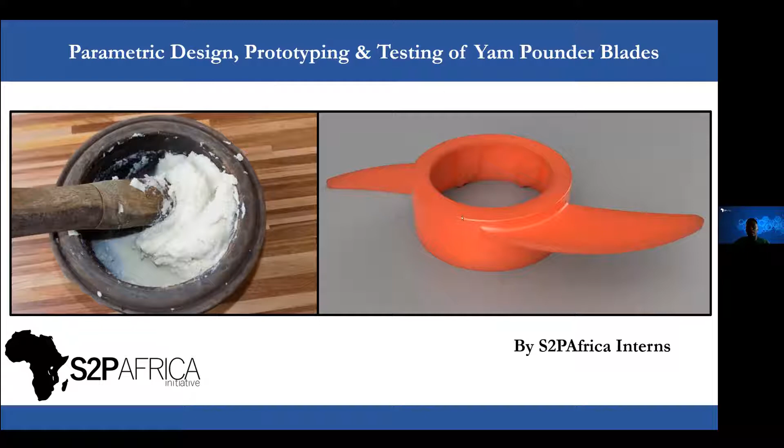So, Pounded Yam is a popular West African staple, normally eaten or complemented with soups, and is a very delicious meal by my heart. And traditionally, it is made by pounding yam into a thick, consistent paste. We use the mortar and pestle to do that. But now there are modern machines that actually do the work. So we have pounded yam machines that pound yam very well. But these only pound yam.

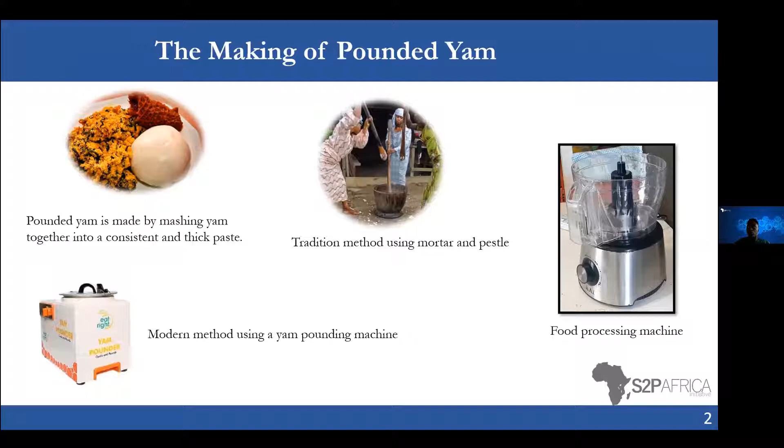People over time have realized that you could use food processors to pound yam, but therein lies the problem. The blades for food processors are generally designed to slice and dice yam. They don't really pound the yam properly. So what you end up having is a lumpy mash of food. And locally made machines actually do pound the yam very well, but they're usually expensive and they're usually over-designed. So we wanted to exploit this.

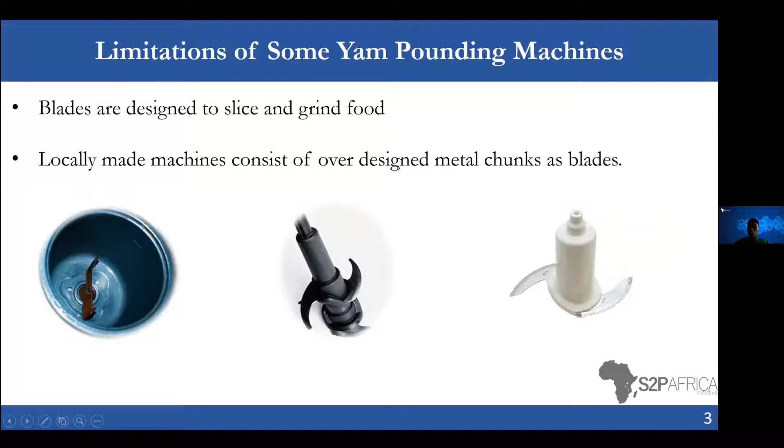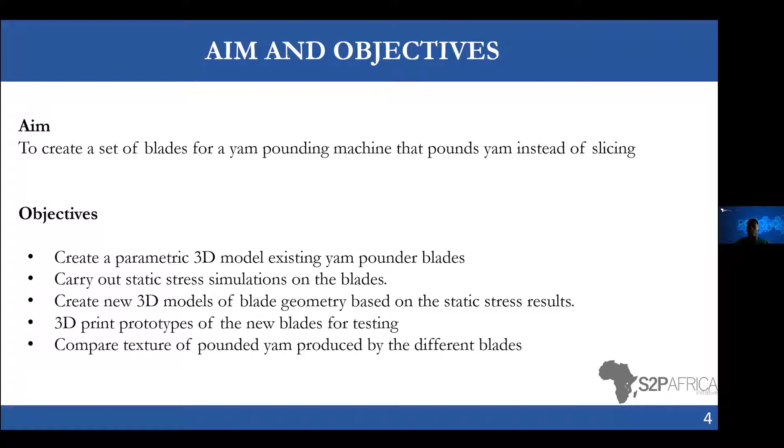What do we want to do? We want to design a set of blades that will properly pound the yam. How do we hope to achieve this? We'll be creating a 3D model of existing blades. We're going to carry out static stress simulations to see which parts of these blades are most likely to fail. We'll create new models based on that result. We're going to print these blades and we're going to test them. So we're going to be comparing the texture and how well they pound.

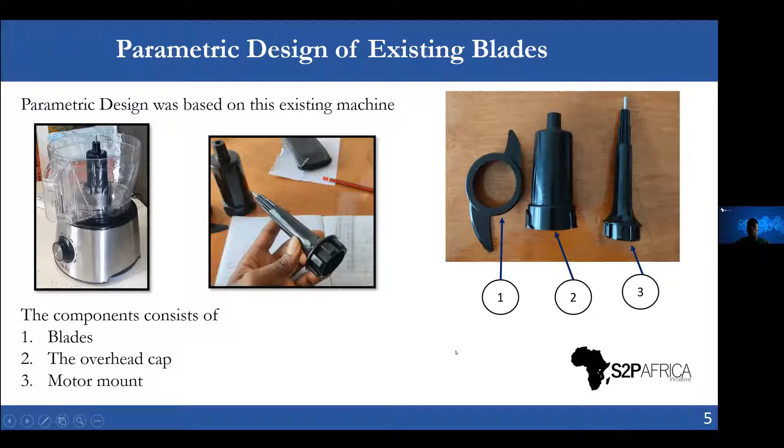The pounded yam assembly consists of 3 parts: the blades, as you can see here, number 1, the overhead cap, and the motor mount. So these 3 components are joined together and they are put into the food processor on the left. So what we want to do is reverse engineer all of these components so that we can 3D print them and make tweaks to the design. So here we have the model, that is the motor mount and the overhead cap. These were designed using Fusion 360, and you can see a section through the model.

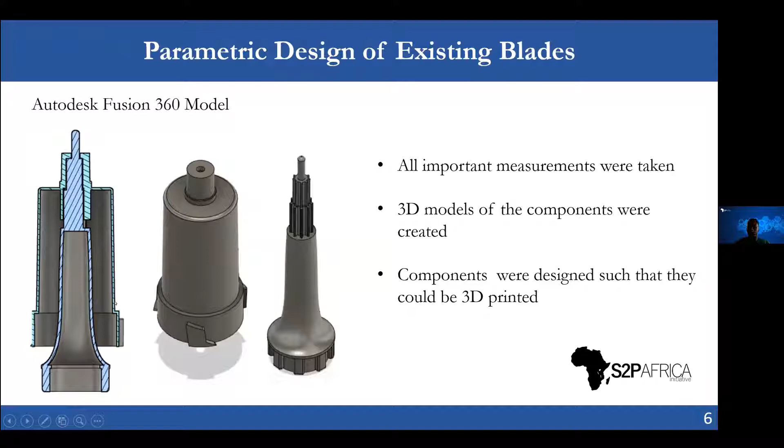Now, the important aspect of this, which is the blades. What influenced our design decisions were basically the pounded yam blades for the machines and the food processor blades. The food processor blades didn't pound properly, but the pounded yam blades pounded properly, but they were just over-designed and heavy. So basically, we brought the best of 2 worlds together. We moved from a slimmer profile to a much chunkier, thicker profile that does the work of pounding better. So this is how we progressed throughout the design phase.

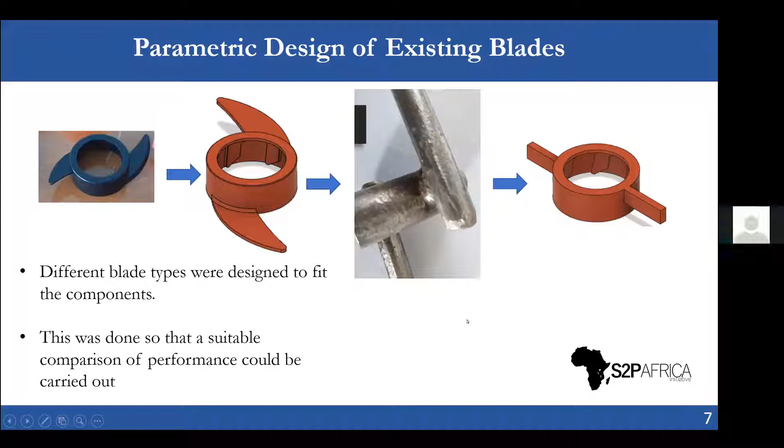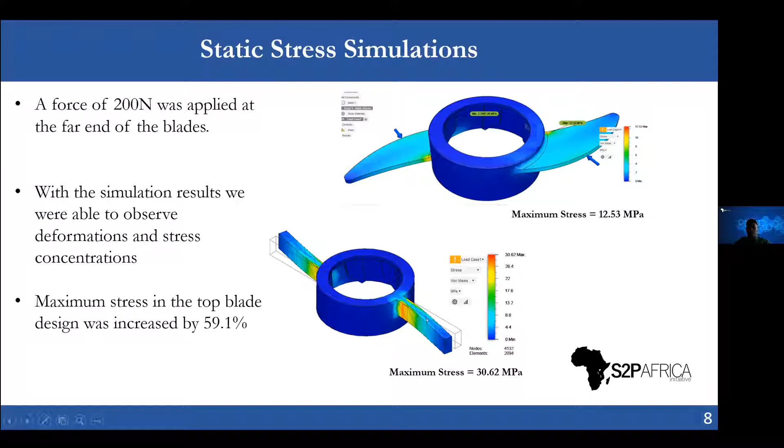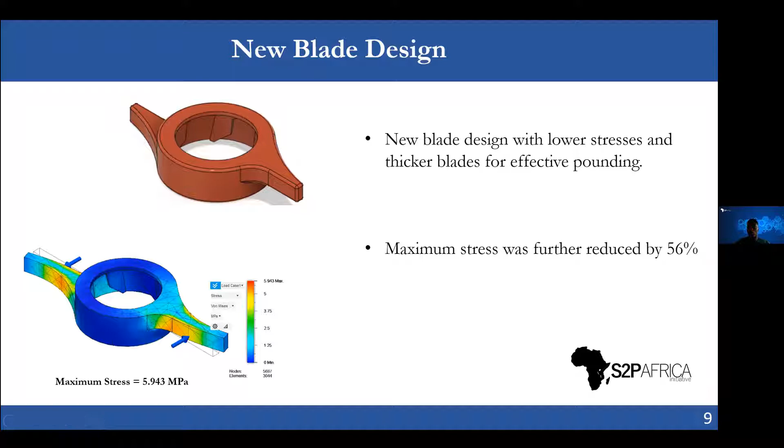And when we refined our geometry and added fillets, we were able to reduce the stress from the original by about 56%. So these new blades are actually stronger than the original, while still giving us the ability to pound yam better because of their beefier features.

Now, permit me to go into a little bit of continuum mechanics here. The reason why we're explaining this is so that we can understand why the von Mises stress is important for us in our simulation. In most simulation software, specifically Autodesk, they use the von Mises stress, and this is because in order to define stress, you actually need 9 components, and all of these components form a tensor. So you need to be able to do an apples-to-apples comparison. We can't necessarily compare a tensor with a scalar, and in this case, our scalar is the yield strength.

So what the von Mises stress allows us to do is find an equivalent magnitude, basically a representation of all of these tensor components as a scalar value, that is, an invariant of the stress tensor, that we can use to do an apples-to-apples comparison. So that's why the von Mises stress is very important.

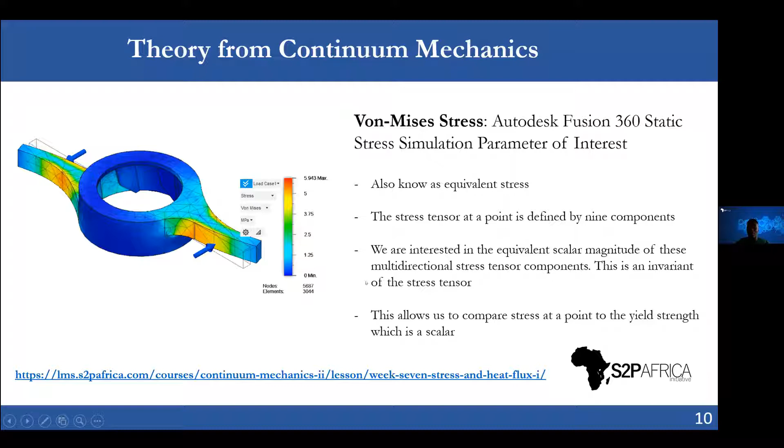For the prototyping, after we had defined our design, we imported them into the slicer software. And here in the slicer software, we can tweak various parameters of our model.

We can increase the number of layers, we can increase the infill, and all those kind of things. And what it does is the slicer converts the 3D CAD file into G code. G code is a set of instructions that the 3D printer can carry out.

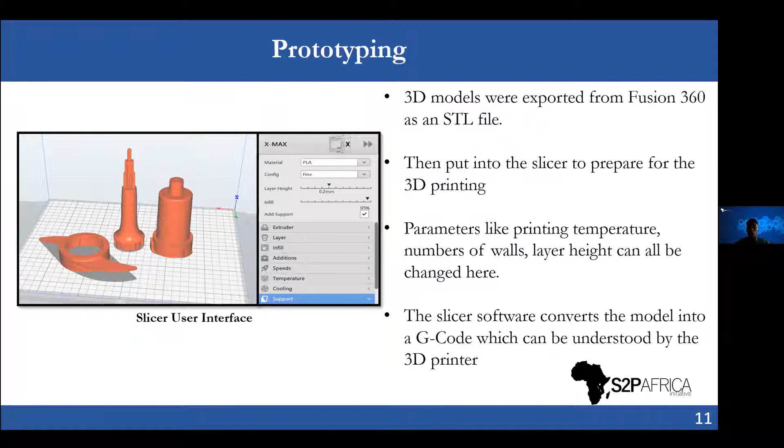Now, at this point, it is important to note that 3D printed parts are generally weak along the z-axis. We did not anticipate this at first because in our simulation, we couldn't see it. Our simulations are carried out as if the whole model is solid. But when we design them, they're going to be in layers.

So there's a chance for us to have a torque failure because these parts are going to be rotating. So when we saw this, we added more walls and more shells in the design so that we can compensate for this failure.

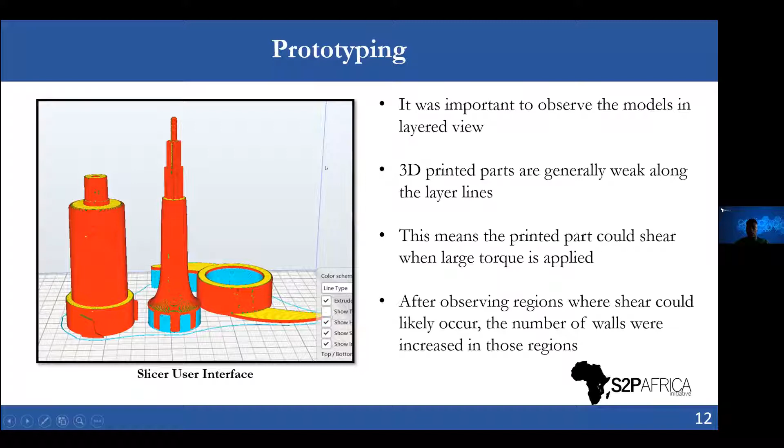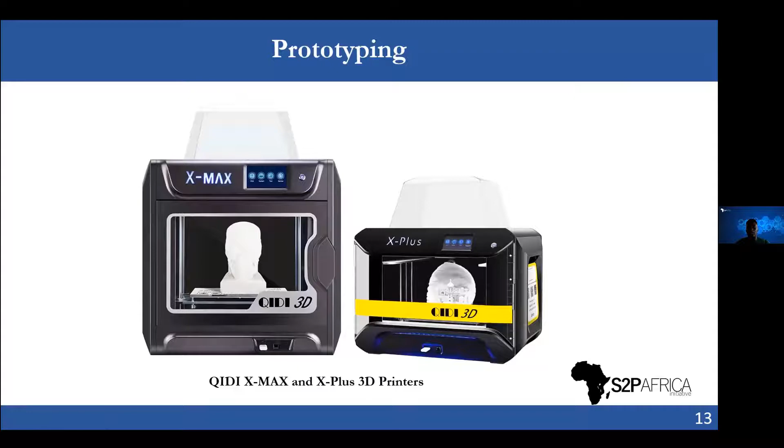Now, I love talking about hardware, so I have to put this here. For those that are curious about the hardware we use to prototype, we use the QIDI X-MAX and the X Plus printers for 3D printing. These are both direct drive printers that we have over at the lab.

So here we have some of the printed components. It turns out that 2.5 mm in your design isn't entirely 2.5 mm when you print it out. There's always that slight tolerance that you have to deal with. So at first, when we printed the blades out, they didn't really fit properly. Some parts were too big, some parts were too small.

I guess that's something you have to go through when you're prototyping. So we made several tests until we got the blades that actually fitted well together. These are just samples of what we designed.

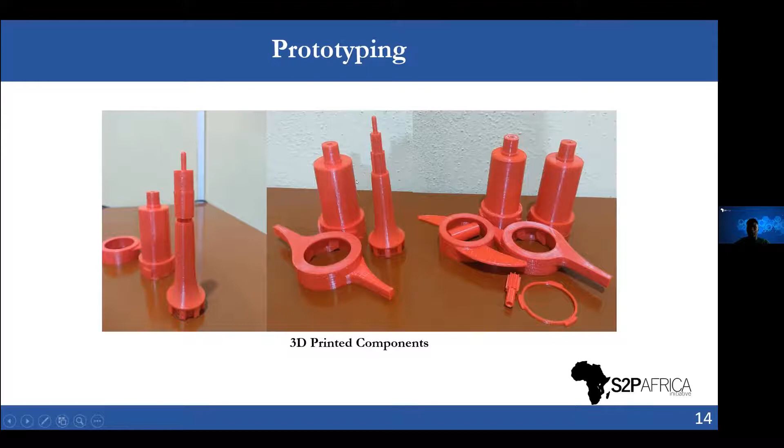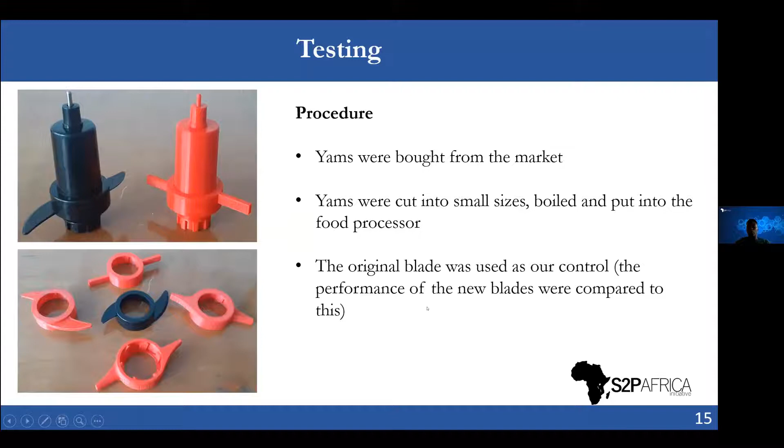So I'm going to play a video now, so you guys can see the results we got from our testing. Okay, so these are yam. This is our setup. This is the yam after cooking it. This is the yam in the food processor, and this is after we've pounded it.

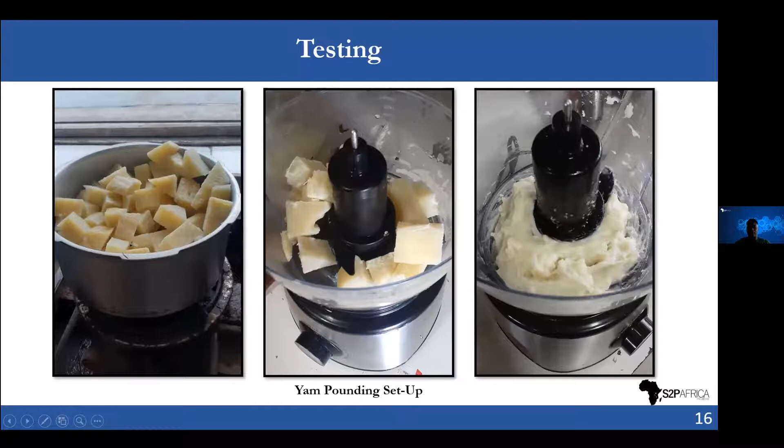Okay. Good day. This is our first test. We're testing our yam pounder blades. For the first test, we have the original blades that came with the yam pounding machine. Notice that these blades are black, and this will be our control test, our control experiment.

Okay, so we're about to start the second test. These blades were designed to fail, at least according to the static stress simulation, under a force of 200 newtons. So we want to see if the yam that we've boiled can actually exert that much force on these blades.

These are the results of our second test. We can see the performance of these blades, not as neat as the first test. We'll move over to testing the third blade. For test 3, we're going to be looking at this set of blades. They have thin blades compared to the blades used for the second test. I want to see how well they can pound the yam using the blender.

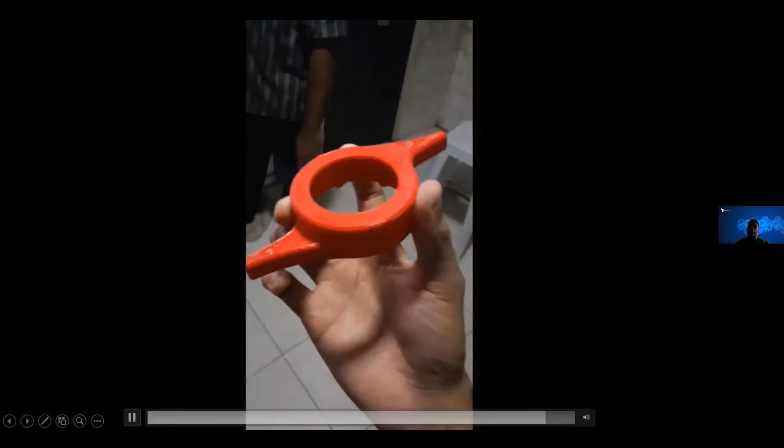On our fourth test, we can see this very excellent result. We can see that the yam is uniform in texture on all sides. It's a very good blend, ready to eat. Experiments done, we can see that the blades from our fourth test performed the best and gave the smoothest texture of pounded yam. These blades take the day.

So these are our optimal blades. These were our best performing blades. They gave the most consistent texture. And during the test, we observed that the coupling mechanism that came in the original design wasn't good enough. While we were pounding, the blades tend to leave the motor mount and move up. But we've already fixed this in our present design. We made a better coupling mechanism, but we just haven't tested it out.